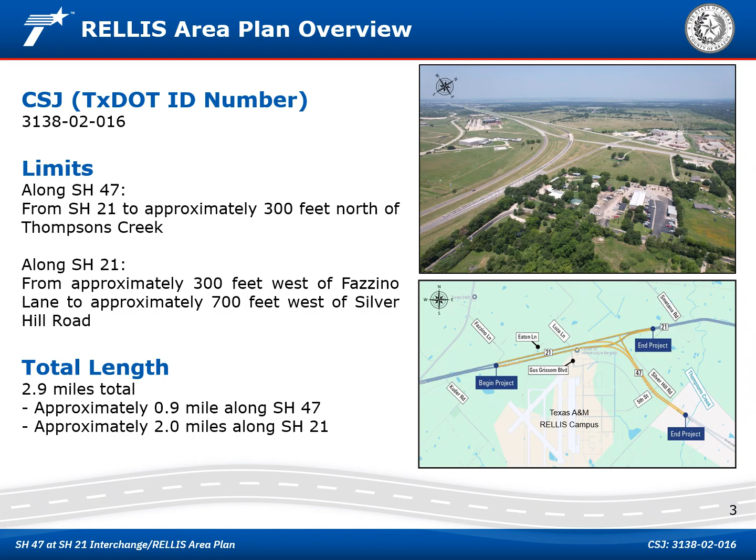The SH-47 at SH-21 Interchange RELLIS Area Plan is located within the city of Bryan in Brazos County, Texas. SH-47 is generally oriented in a north-south direction, while SH-21 is oriented in a west-east direction. Along SH-47, the limits of the area plan extend approximately 0.9 mile from SH-21 to approximately 300 feet north of Thompson's Creek. Along SH-21, the limits of the area plan extend about 2 miles from approximately 300 feet west of Fazzino Lane to approximately 700 feet west of Silver Hill Road. The total length of the RELLIS Area Plan is 2.9 miles.

The SH-47 at SH-21 Interchange RELLIS Area Plan is needed to address several regional and local challenges. At present, the roadway does not have enough capacity to handle future traffic expected from ongoing and future land development and anticipated population growth. Connectivity between local roads and the two highways is limited, which makes travel less efficient. Additionally, the area has seen a moderate number of crashes along the corridor.

This area plan is being developed to optimize mobility and traffic flow by upgrading the interchange to meet future traffic demands. This plan is also designed to improve connections with local roads by reconfiguring key intersections. By upgrading the intersections to modern design standards, the RELLIS Area Plan would help reduce crash rates along the corridor and improve overall driver safety.

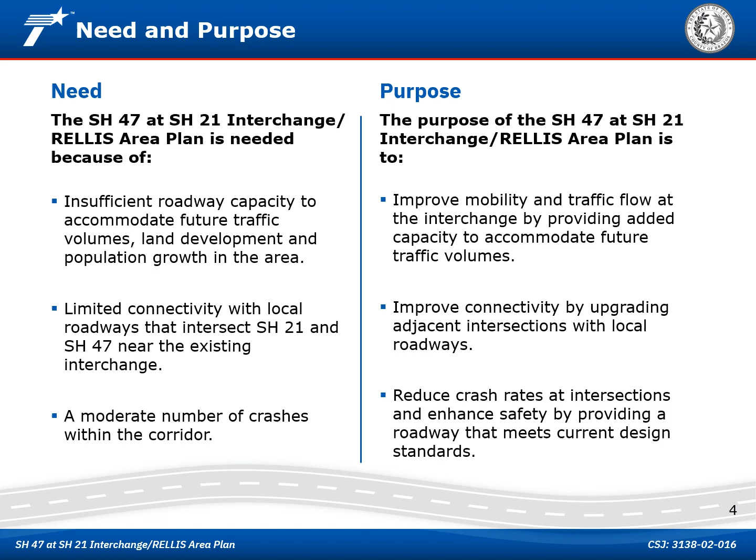Brazos County and TxDOT are collaborating with member agencies of the Bryan College Station Metropolitan Planning Organization to develop the RELLIS Area Plan in order to improve the SH-47 at SH-21 interchange. The proposed plan is being developed under the 2022 Brazos County Transportation Road Improvement Program, which consists of a bond program approved by voters in November 2022. While the design and environmental studies of the plan are funded under the bond program, the plan itself is not currently funded for construction.

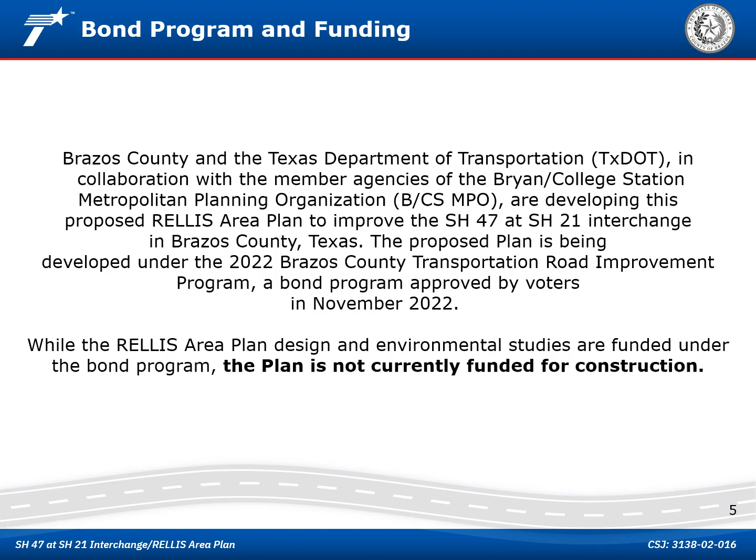From 2018 to 2022, a total of 63 crashes have been reported within the area of the SH-47 at SH-21 interchange, including 1 fatality and 1 serious injury. To improve safety for the traveling public, proposed improvements include the addition of roundabouts, reconfiguration of key intersections, roadway realignments, and modifications to access points along the SH-47 and SH-21 corridors. Notable changes include a new entrance and exit to the RELLIS campus along SH-21, closure of the SH-21 access to the RELLIS campus via Gus Grissom Boulevard, and the removal of Silver Hill Road access to SH-47 via Goodson Bend Road.

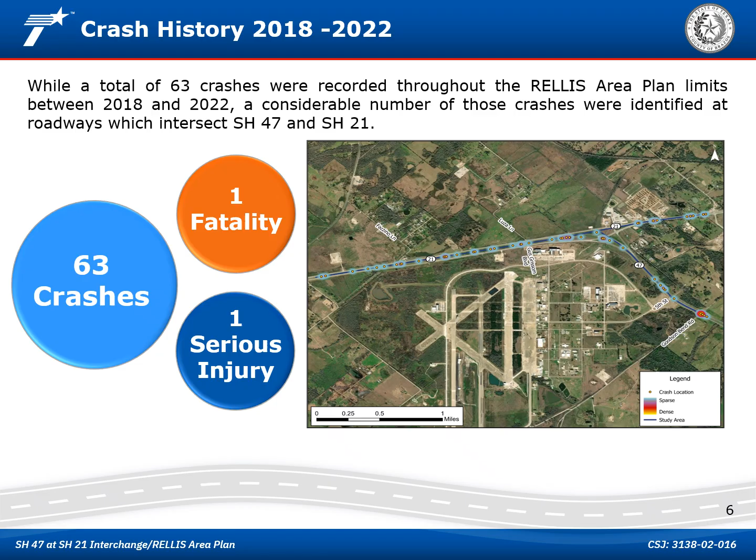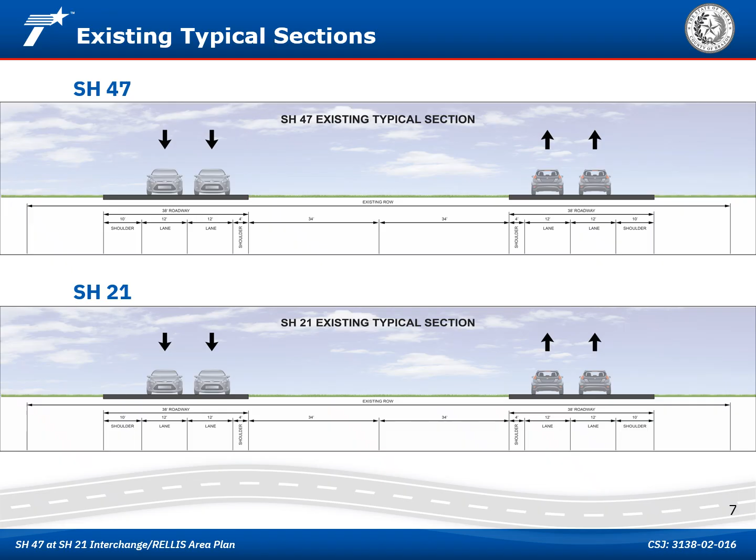The existing SH-47 roadway consists of a 4-lane roadway, which includes two 12-foot wide main lanes in each direction, 10-foot wide outside and 4-foot wide inside shoulders, and a 68-foot wide grassy median between the northbound and southbound main lanes. The existing SH-21 roadway consists of a 4-lane roadway, which includes two 12-foot wide main lanes in each direction, 10-foot wide outside and 4-foot wide inside shoulders, and a variable width grassy median between the eastbound and westbound main lanes in the vicinity of the interchange.

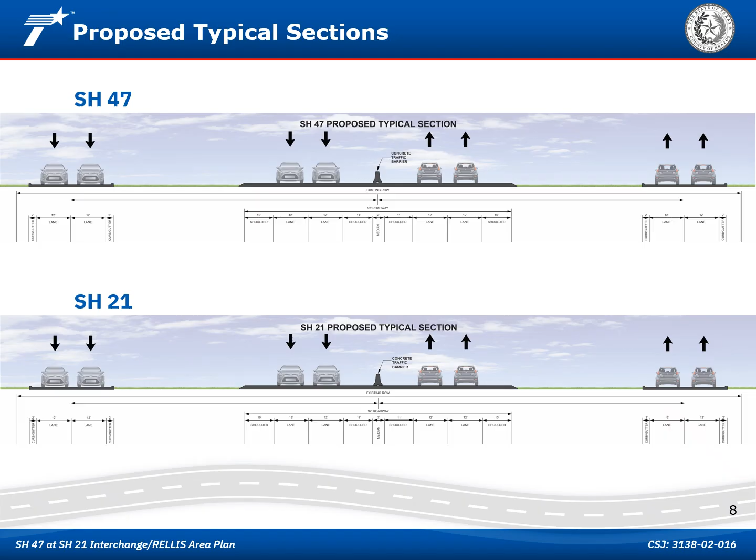The proposed SH-47 improvements include a new north-south 4-lane roadway consisting of 2 lanes in each direction with shoulders separated by a concrete traffic barrier. In addition, 2-lane frontage roads going north and south will be built parallel to the SH-47 main lanes. The proposed SH-21 improvements include a new west-east 4-lane roadway consisting of 2 lanes in each direction with shoulders, separated by a concrete traffic barrier. In addition, 2-lane frontage roads going west and east will also be constructed parallel to the SH-21 main lanes.

There are 3 different types of roadway improvements proposed at this time. These 3 improvements include an interchange upgrade, overpasses, and roundabouts. An interchange is commonly used to reduce traffic conflicts and collisions by eliminating left turns, while also linking major highways with local roads or other highways. Potential benefits include increased highway capacity by preventing bottlenecks and distributing traffic more efficiently, along with improved travel times through higher speeds and smoother traffic flow.

An overpass is typically used to improve highway main lane traffic flow by allowing vehicles to bypass intersections by separating roads at different levels. This design helps reduce congestion and enhances safety by eliminating intersection conflict points between roadways. Overpasses also lower the number and severity of crashes, efficiently managing traffic movements through an intersection.

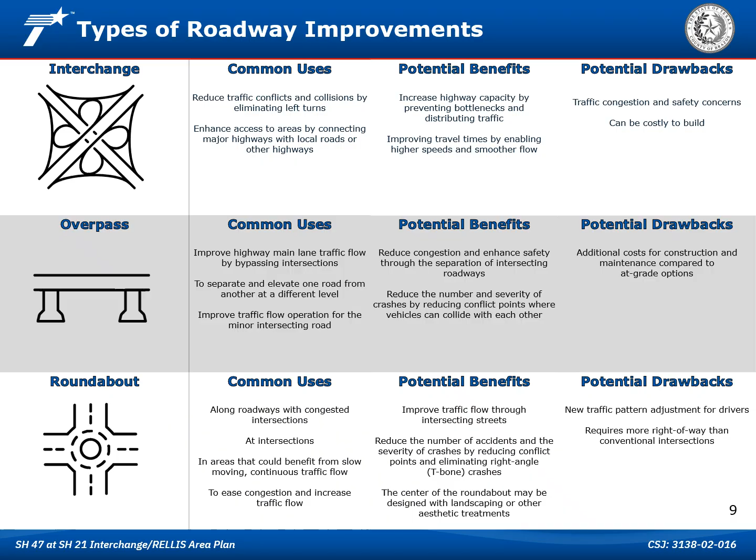A roundabout is often used along roadways with congested intersections, especially in areas that benefit from slow-moving continuous traffic flow. Roundabouts can ease congestion and increase traffic flow by facilitating vehicle movements through intersecting streets. Roundabouts also help reduce the number and severity of crashes by limiting conflict points where vehicles typically collide and eliminating right angle or T-bone crashes, which are typically the most severe.

Based on public comments received at public meeting number 1, several design revisions were advanced to improve safety, mobility, and access throughout the SH-47 at SH-21 interchange. After evaluating conventional signalized intersections versus dogbone roundabouts at key frontage road and cross-street locations, roundabouts were selected for their proven advantages in reducing delays and enhancing traffic flow.

A new exit ramp was added to the design from the SH-47 direct connector to the westbound SH-21 frontage road, improving connectivity for westbound travelers. Access to the area north of SH21 was provided via the proposed frontage road to accommodate future development.

To address safety concerns at Fazzino Lane, a restricted crossing U-turn, which is known as an R-cut, was incorporated into the roadway design. This innovative design reduces conflict points and improves traffic operations, especially at intersections with a history of crashes. A northbound frontage road segment was introduced between 5th Street and SH21 to support local circulation and access.

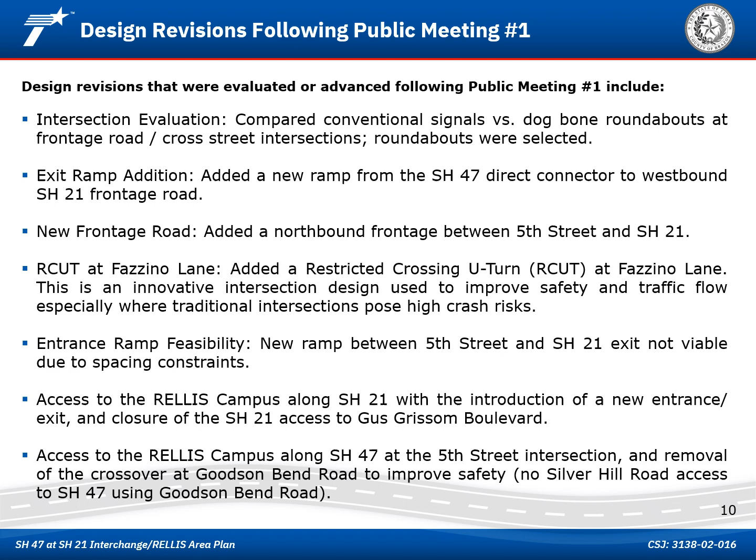From 2018 to 2022, a total of 63 crashes have been reported within the SH47 at SH21 interchange, including 1 fatality and 1 serious injury. To improve safety for the traveling public, proposed improvements include the addition of roundabouts.

In terms of long-term benefits, the proposed roundabouts on SH21 and SH47, along with improved turning movements along SH21, are designed to enhance safety, improve traffic flow, and increase roadway connectivity within the RELLIS Area Plan limits. These design improvements are expected to increase the efficiency of vehicle movements and reduce congestion during peak travel periods.

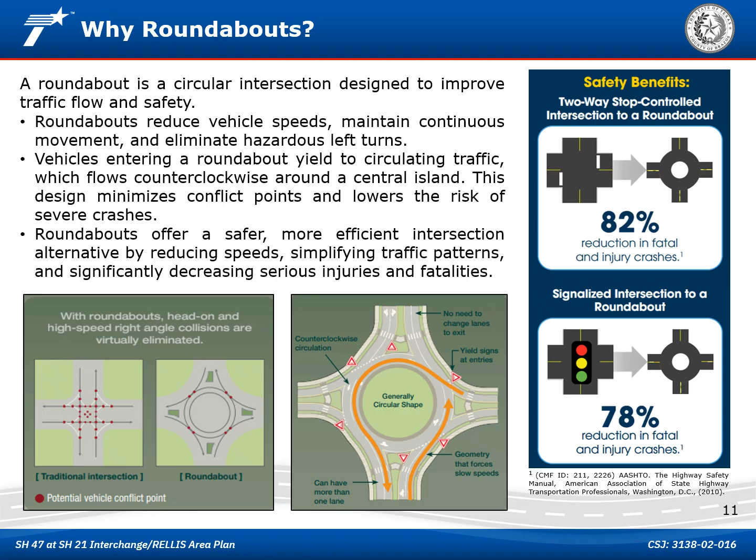As a result of these changes, adjustments will be required from the traveling public. Several local roads, including Fazzino Lane, Eaton Lane, Luza Lane, Silver Hill Road, and Goodson Bend Road, will experience altered travel patterns.

Roundabouts are proposed along SH21 and SH47. Roundabouts are an option to traditional signalized intersections and are intended to enhance traffic flow by minimizing stop-and-go conditions and reduce vehicle idling. From a safety perspective, roundabouts offer significant advantages by lowering travel approach speeds, allowing continuous movement through the intersection, and eliminating hazardous left turn maneuvers.

The roundabout on SH21 would provide access to a future RELLIS campus entrance south of SH21 and connectivity to areas north of SH21. Approximately 1.9 acres of right-of-way would be required to implement the proposed roundabout design in this area.

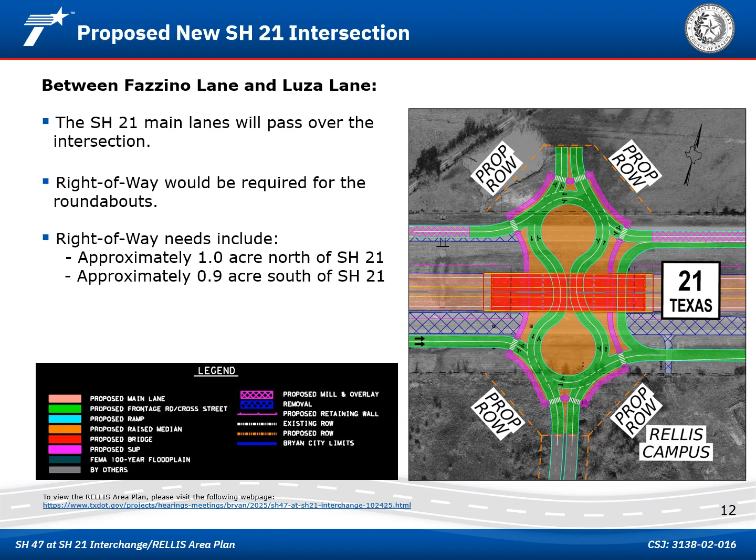The proposed roundabout on SH47 would provide access to the existing RELLIS campus entrance west of SH47 and connectivity to other roadways along SH47, including a new northbound frontage road proposed between 5th Street and SH21. No additional land would be required to implement the proposed roundabout design in this area.

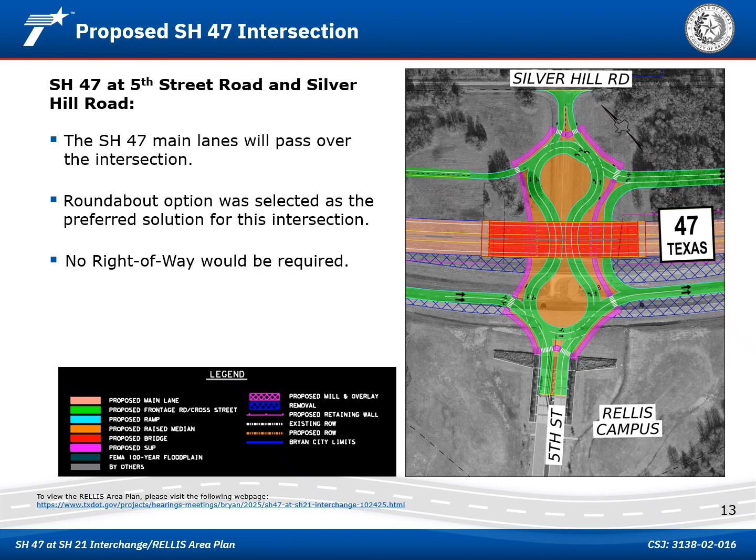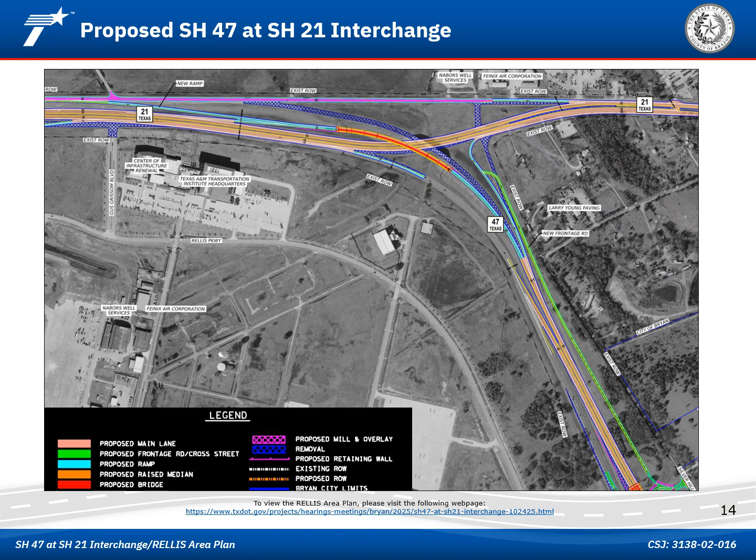SH47 at SH21 Interchange. The proposed plan is expected to receive federal funding. Therefore, TxDOT is required to evaluate potential environmental impacts with respect to federal regulatory standards. This evaluation follows the National Environmental Policy Act, commonly known as NEPA.

On July 17, 2025, TxDOT signed a Memorandum of Understanding with the Federal Highway Administration. This agreement allows TxDOT to take the responsibility from the FHWA for reviewing and approving certain NEPA-related projects. The assignment of this responsibility from the FHWA to TxDOT is called NEPA assignment. This assignment applies to this plan and guides the environmental review process, which is currently underway.

As part of the NEPA process, the assessment of environmental constraints helps to identify sensitive features that may be affected by the proposed plan. The identification of environmental constraints early in the planning, design, and environmental review process allows for the avoidance and minimization of potential environmental impacts as the design advances.

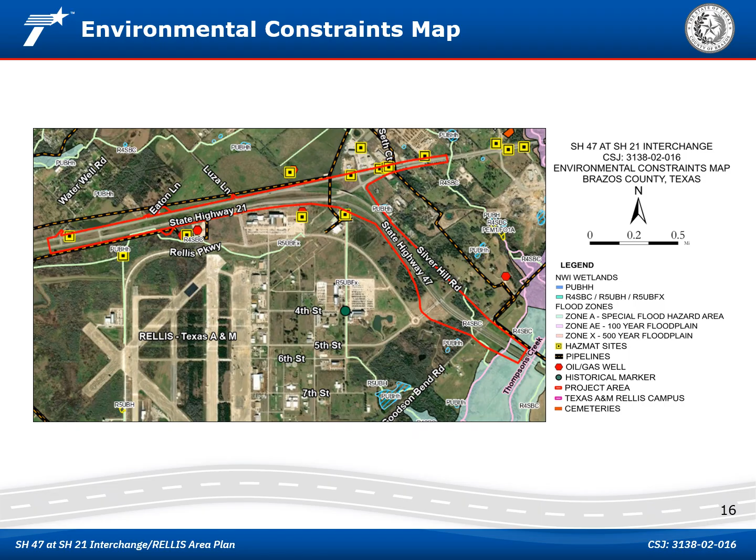Areas that are under review include air quality, community impacts, environmental justice, archaeological resources, historic resources, hazardous materials, indirect and cumulative impacts, biological resources, traffic noise, and water resources. The plan is being designed to avoid or minimize impacts to the greatest amount practicable. Once completed, technical reports documenting the analysis and conclusions of these studies will be available for review upon request.

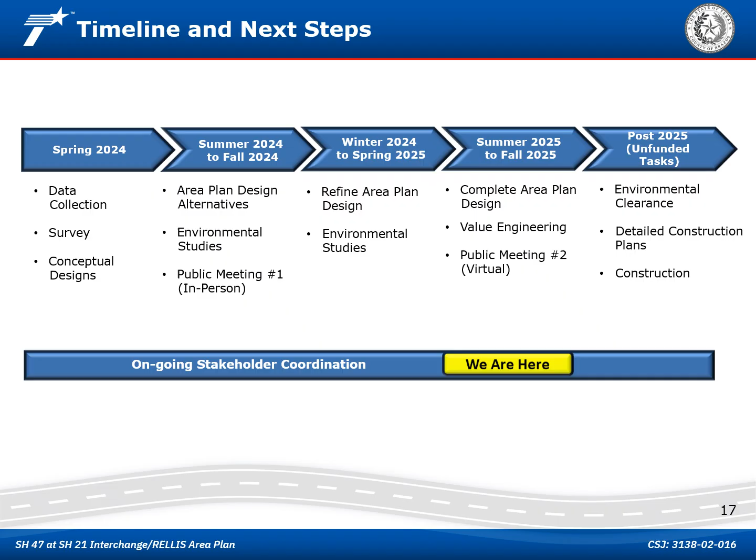The area plan design and environmental review are expected to wrap up this winter. A construction start date will depend on when construction funding becomes available.